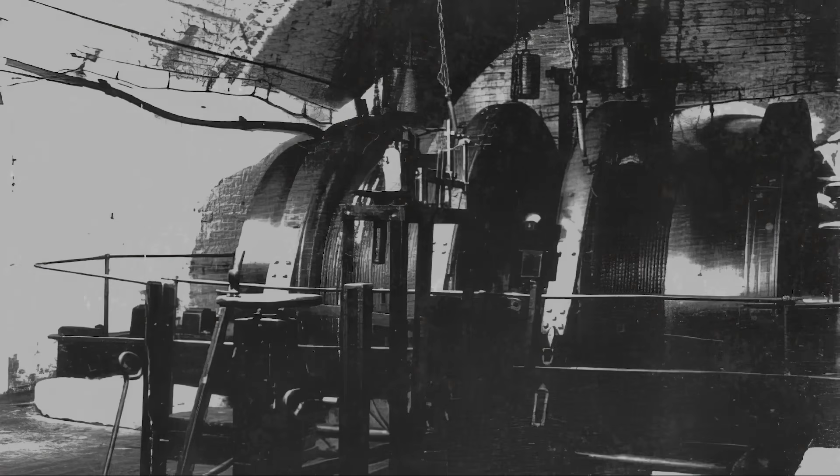1862, Northumberland, and the winding engine at New Hartley Colliery is already turning when the morning shift steps into the cage. The drum is cast iron, nearly 12 feet across, and the wire rope coiled onto it is thicker than a grown man's wrist. The engine house smells of hot tallow and coal smoke, and something older beneath both: the mineral exhalation of a shaft sunk more than 600 feet into the earth.

The floor of the house vibrates at a frequency too low to hear. Men feel it in the arches of their feet. They have felt it every working morning of their adult lives, and they do not notice it anymore, which is exactly how things stood on the morning of January the 16th. The banksman at the surface calls the signal. 3 bells. The engineman advances the throttle.

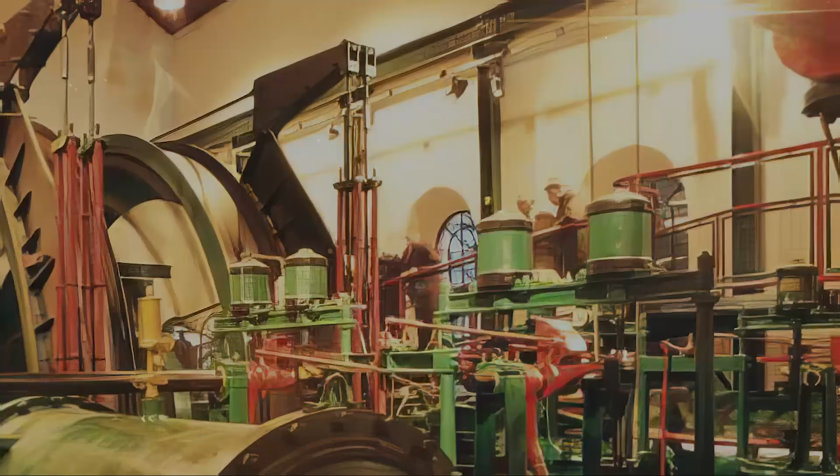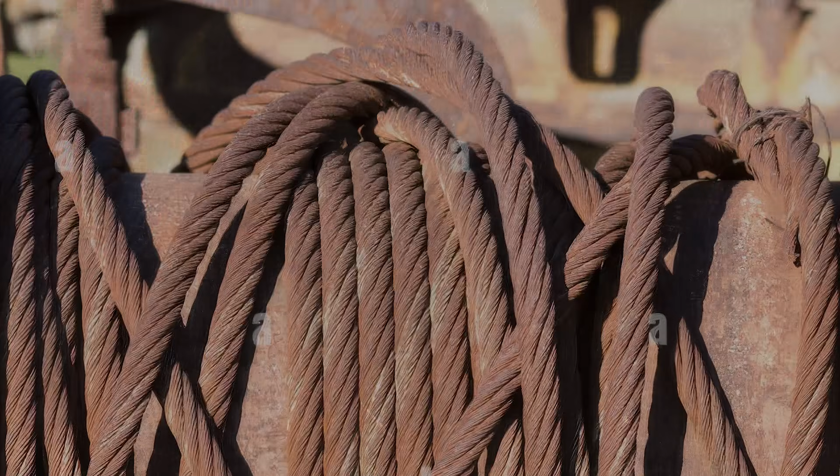The drum rotates. 204 men and boys ride down into the dark in the cage, and in the corves descending alongside it, the way they always do. Their bodies pressed together in the blackness, boots on iron, the rope above them taut and reliable. That is the last ordinary moment in the history of New Hartley.

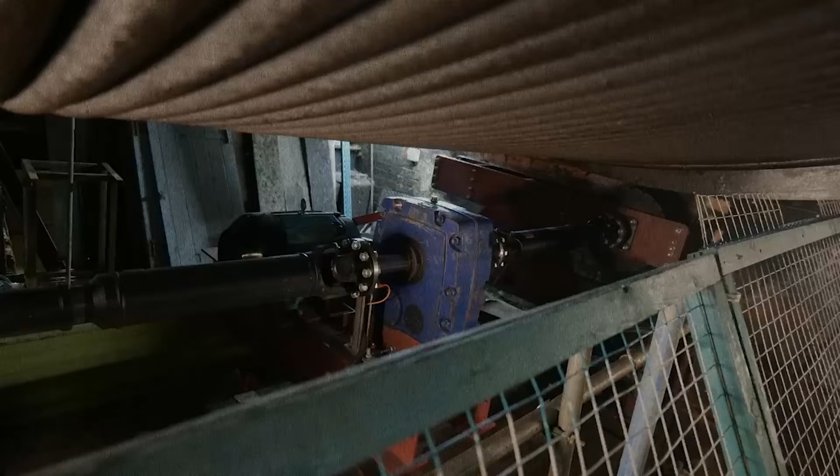What happens next? The snapping of a cast iron beam, the collapse of the headgear, the sealing of the only shaft, is not a failure of the winding engine itself, but the catastrophe it produces belongs entirely to the logic of the machine's world, a world built on the premise that a single rope through a single shaft is sufficient passage between the living and the dead.

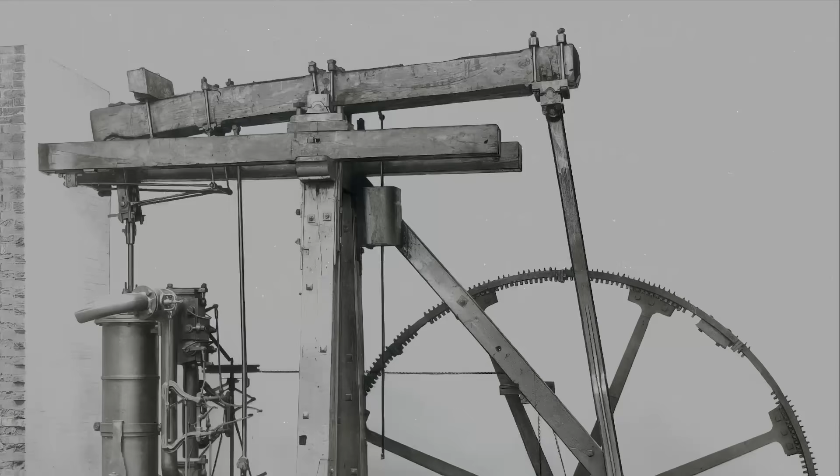To understand why that logic existed, why it seemed not just acceptable but rational for the better part of a century, you have to go back to the problem that created the winding engine in the first place. Back to the moment when coal became the appetite of an industrializing civilization, and the earth simply refused to give it up without cost.

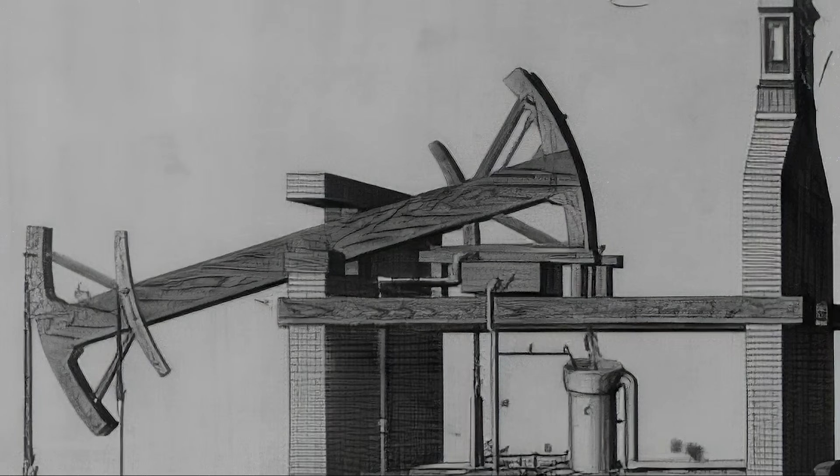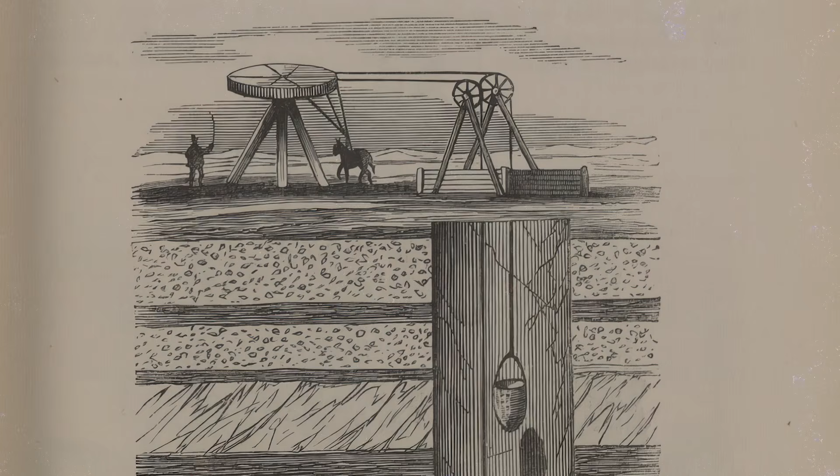By the early 18th century, the collieries of Northumberland and Durham had already exhausted the shallow measures. Shafts that once ran 150 feet had been worked to nothing. The seams men needed were deeper, 300 feet, 400, and the numbers kept growing, and at those depths, the horse gin, that ancient circular contraption of beam and horse and rope, reached the hard boundary of its physics.

A horse produces roughly 1 horsepower. A single gin could raise perhaps 40 pounds of coal per minute from 300 feet, and at that rate the economics of deep mining were simply impossible. The owners understood the arithmetic. The horses understood nothing except the circle they walked, but even they were being replaced not by a better horse,

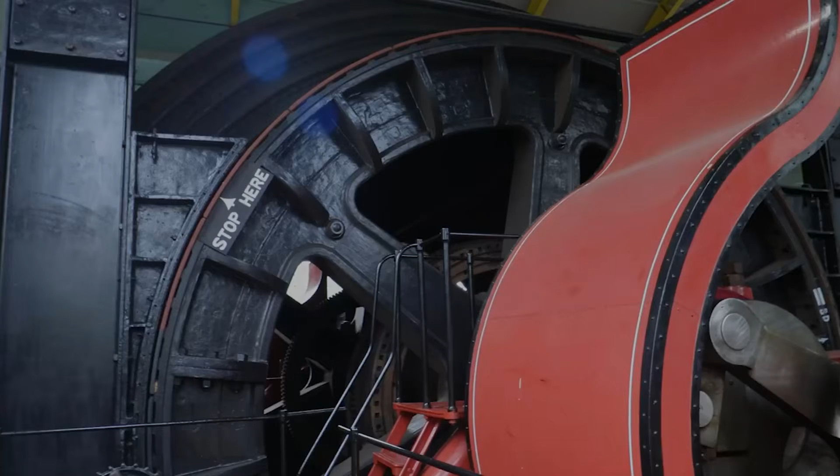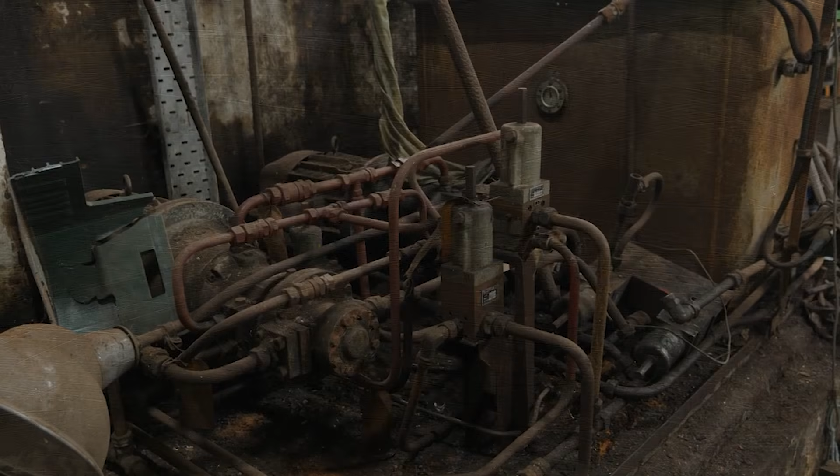but by steam. James Watt's improvements to the Newcomen atmospheric engine in the 1760s and 1770s produced a machine that could do rotary work, continuous rotary work, and the colliery owners of the northeast coalfields grasped the implication immediately. By the 1790s, winding engines driven by steam were replacing horse gins at the major Northumberland and Durham pits.

The transition was not gradual. It was a decision, made mine by mine, driven by the same calculation every time. Deeper coal, more coal, faster coal, and no animal alive could provide it.

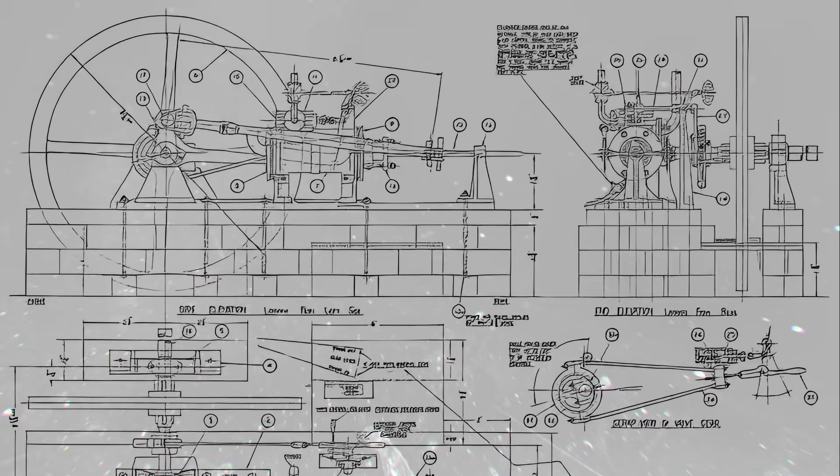John Buddle, the most capable colliery viewer of his generation, overseeing operations across the northeast coalfields in the first decades of the 19th century, understood the winding engine as the central nervous system of any serious mine. Without it, depth was a ceiling. With it, depth became a resource.

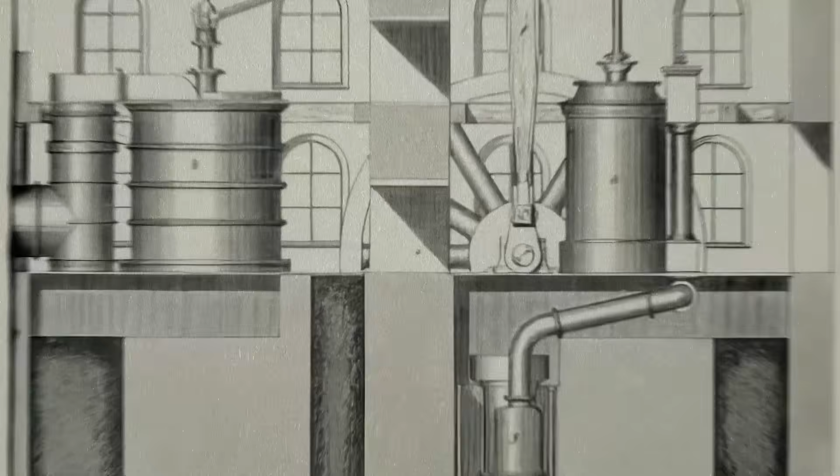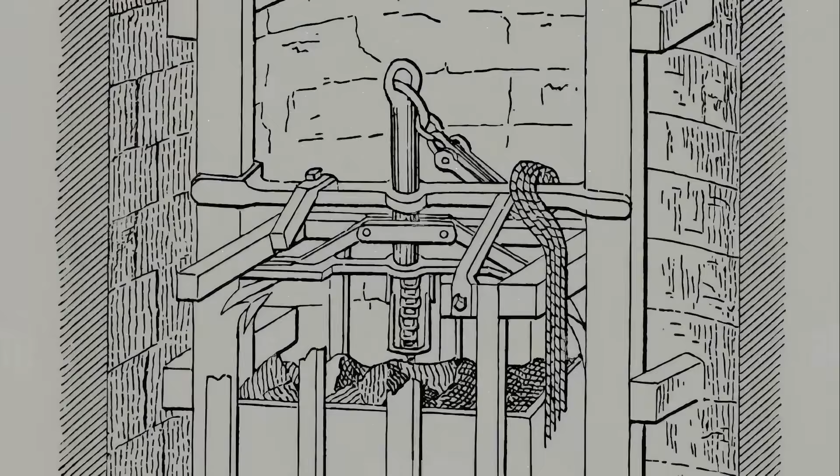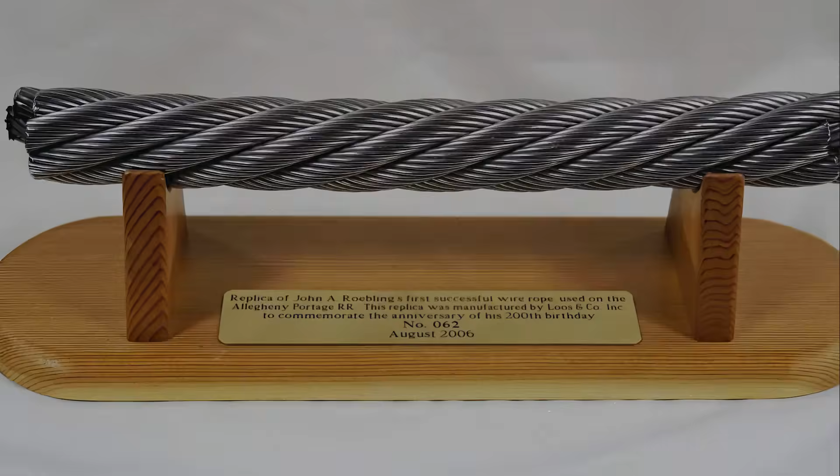The engine Buddle and his contemporaries installed was conceptually simple. A steam cylinder driving a crank, the crank turning a drum, the drum winding or unwinding a rope, the rope raising or lowering a cage or a set of loaded corves. The early drums used flat hemp rope, which limited load. Wire rope, adopted progressively through the 1830s and 1840s, changed everything: stronger, more consistent, capable of carrying far greater loads across far greater depths.

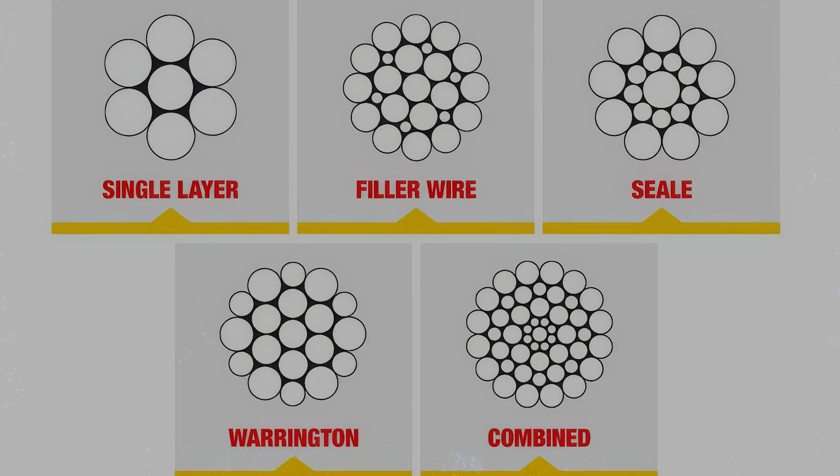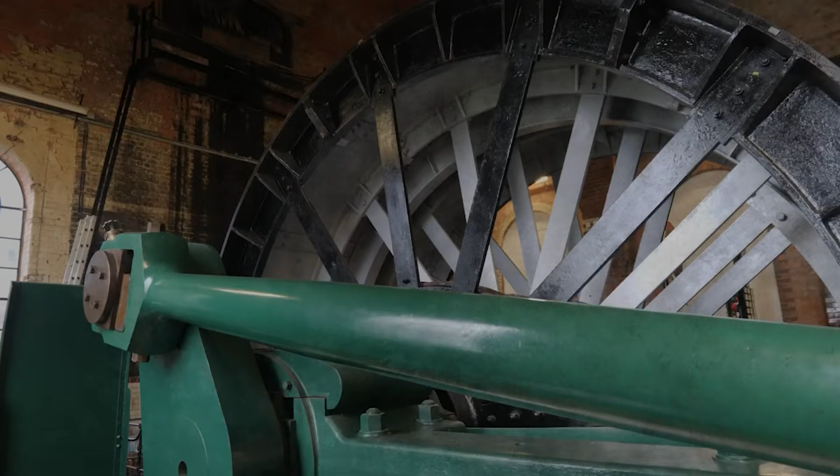The wire rope was itself a manufactured object of remarkable sophistication. Dozens of individual drawn steel wires twisted into strands, the strands twisted into the rope, each layer of twist running counter to the last, so that the whole assembly would not unravel under load. A good rope, properly maintained, could last years at moderate depths. At great depth, under repeated shock loading, it aged invisibly, its internal wires fatiguing in ways no surface inspection could detect until the moment of failure.

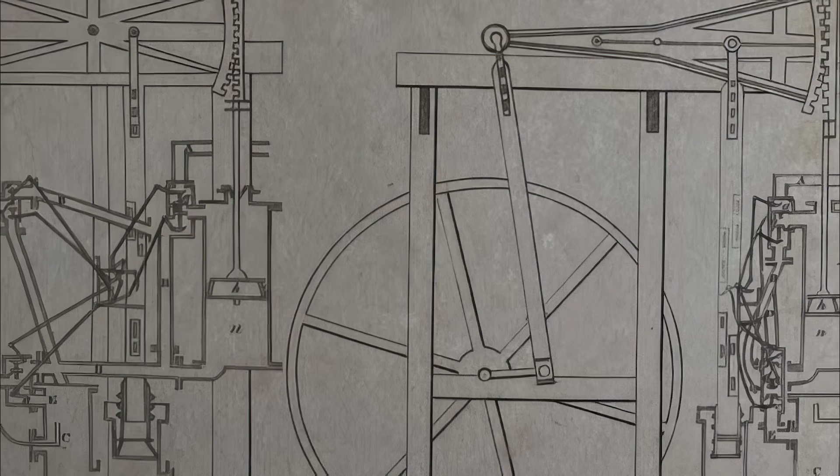And here is where the machine's first irony enters the story with the calm indifference of a mathematical fact. The larger and more powerful the winding engine became, the more energy it concentrated into that single rotating drum. A horse gin stored almost nothing. Stop the horse, the rope stops. A steam winding engine with a 12-foot drum spinning at speed stored kinetic energy in the tens of thousands of foot-pounds, and that energy did not care about the intentions of the engineman who governed it.

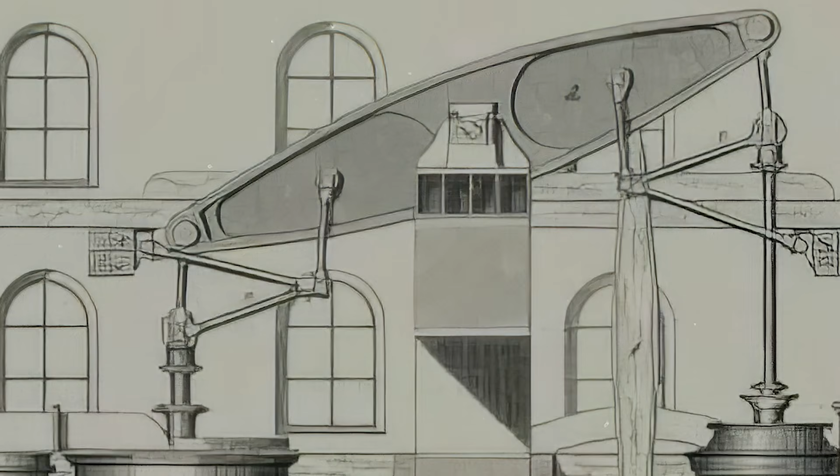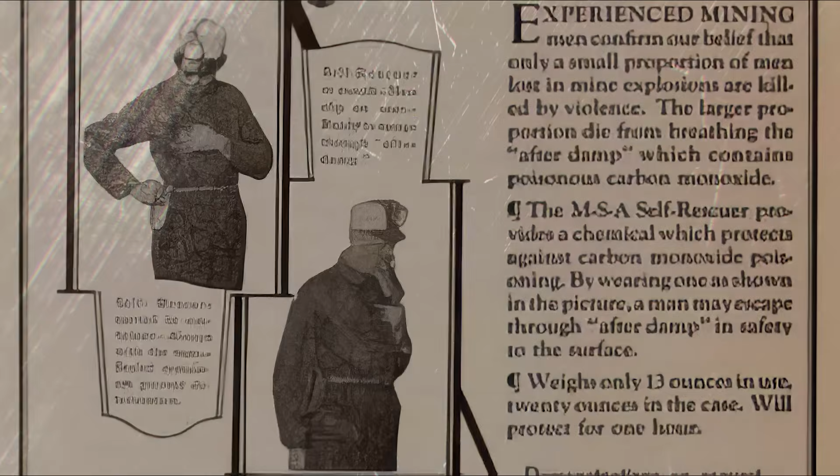To address this, engineers added governors, centrifugal devices that would theoretically cut steam supply if rotational speed exceeded a set threshold, and they added indicator boards, calibrated dials that showed the engineman where the cage was in the shaft at any moment. These were the safety systems. They worked most of the time, and their existence gave the owners and the regulators a language of reassurance. The machine had protections. The protections were documented. That was, for several decades, considered sufficient.

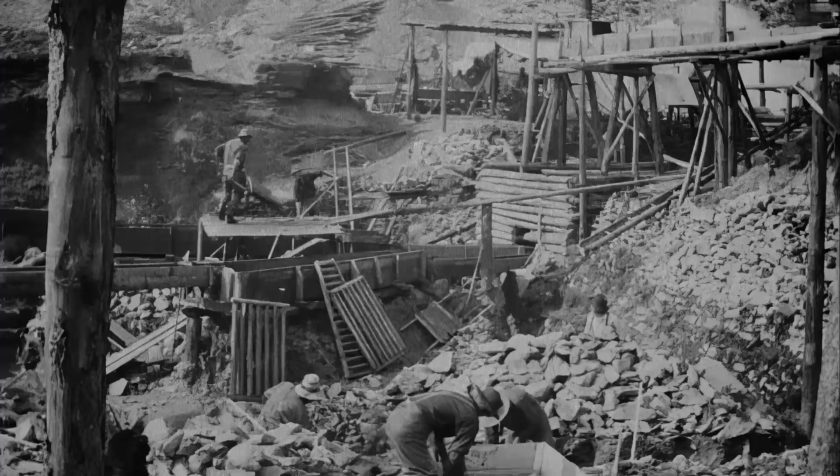By the 1840s and 1850s, the winding engine had spread to every significant coal field in Britain and had crossed the Atlantic to the hard rock mines of Pennsylvania, Michigan, and Virginia. It had crossed to the gold reefs of New South Wales and the copper lodes of South Australia. Everywhere the logic was the same: one shaft, one rope, one drum, one engineman.

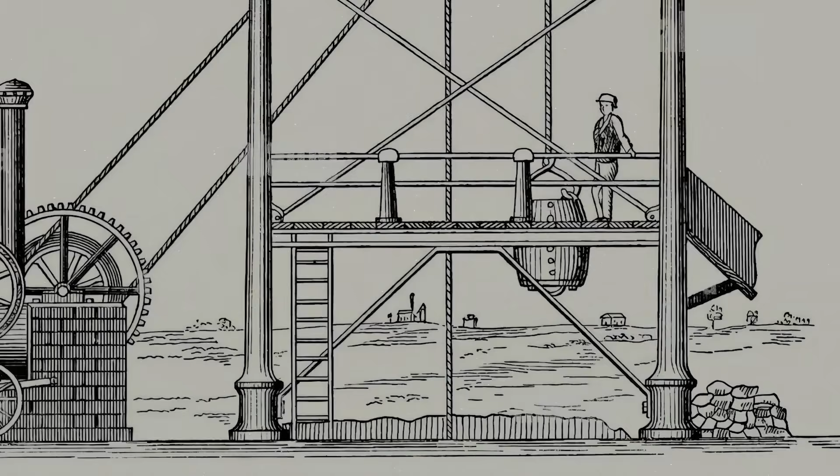Mines Inspectorate reports from the 1850s, the first systematic records of shaft accidents in British collieries, noted overwinding incidents with a frequency that should have been alarming. A cage carried too far up the shaft by an engineman who misjudged his indicator, the rope snapping under the sudden arrest, the cage falling, men killed or maimed.

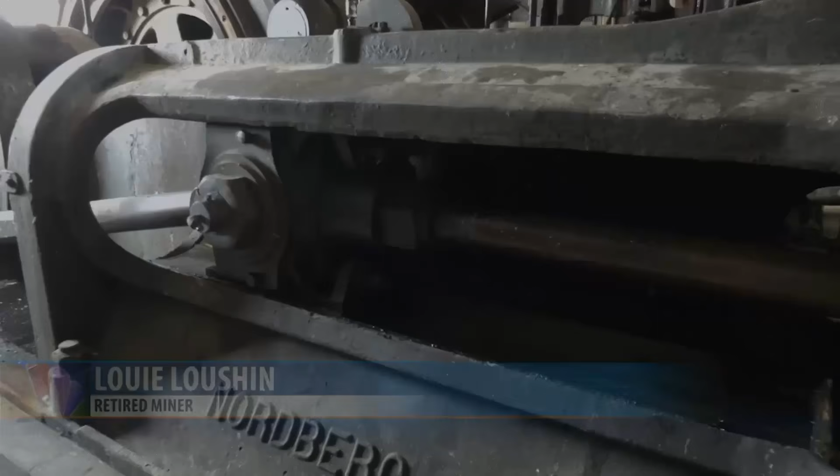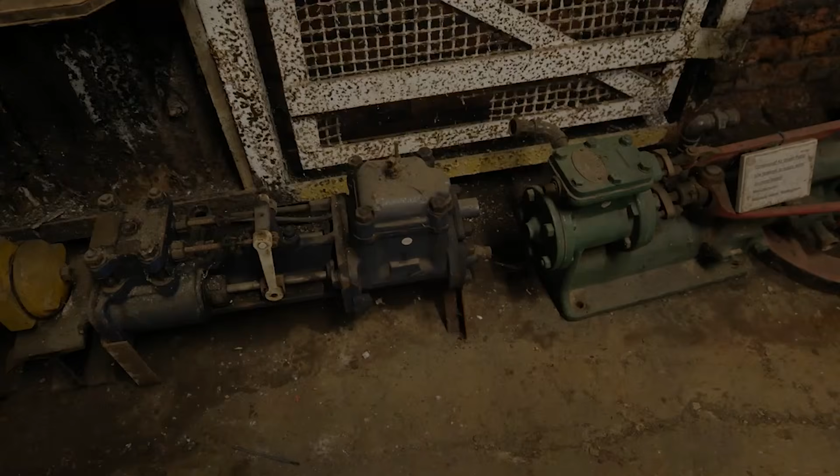The detaching hook was the engineering response, a device fitted above the cage that was supposed to release the rope automatically if the cage overshot the surface, allowing the cage to settle onto the headgear structure rather than being pulled through it. It was a genuine innovation. It was also a mechanism that required precise calibration, regular testing, and correct installation to function at all.

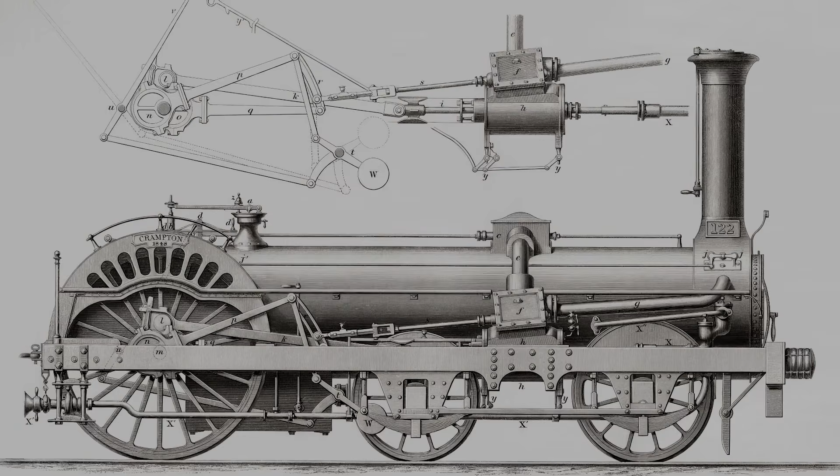And the Inspectorate's own reports across the 1850s and 1860s documented dozens of cases where detaching hooks had been set incorrectly, had not been tested within any reasonable interval, or had simply failed to trigger when the moment arrived. The system had a safety layer. The safety layer depended entirely on maintenance discipline that the economic logic of the mine consistently eroded.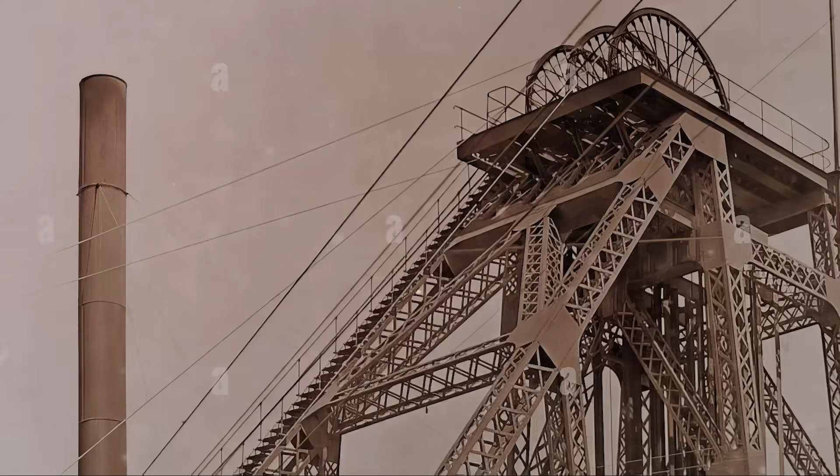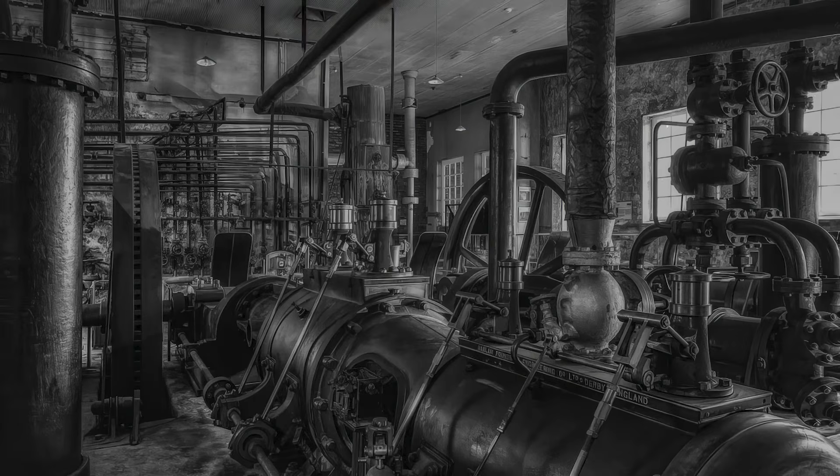By 1870, there were more than 500 steam winding engines operating in the British coalfields alone. By 1890, the shafts they served had deepened substantially, 800 feet, 1,200 feet, and in South Africa, where the Witwatersrand gold rush of 1886 began sinking reefs to previously unimagined depths, shafts would eventually reach more than a mile underground.

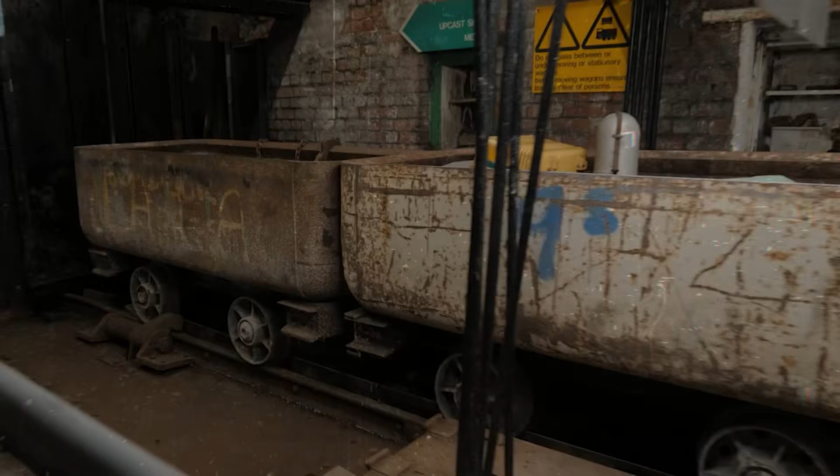The engine houses above those South African shafts were enormous brick structures, their interiors hot even in winter from the radiant heat of cylinder jackets and steam pipes, the air tasting of iron oxide and grease, the vibration through the concrete floor strong enough to blur a man's vision if he stood in the wrong place and looked at a fixed point. At those depths, the winding rope itself weighed tons before any cage or payload was attached.

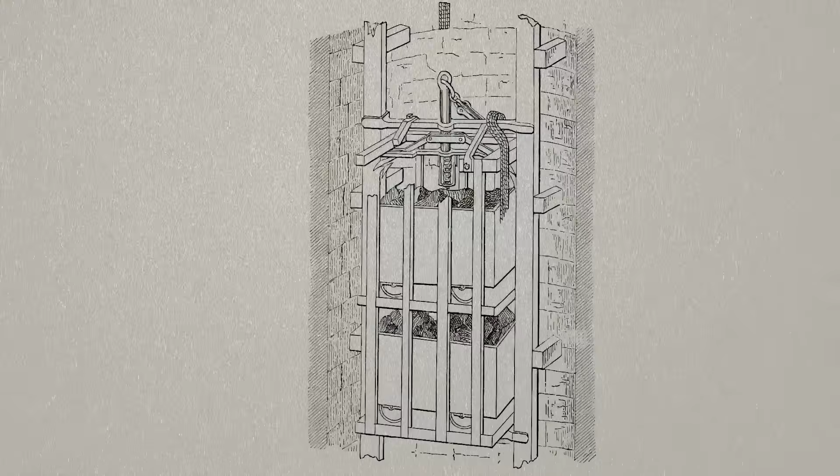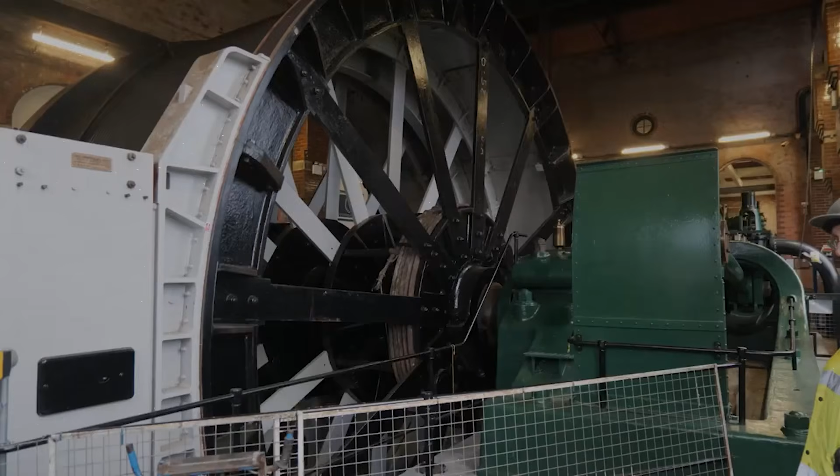A rope of steel wire descending 3,000 feet and returning weighed more than the loaded cage it carried, and the dynamics of that rope, its elasticity, its resonant frequency under load, the shock wave transmitted through it when a cage was suddenly arrested, added layers of mechanical complexity that the original designs had never contemplated. The drum diameters grew to match.

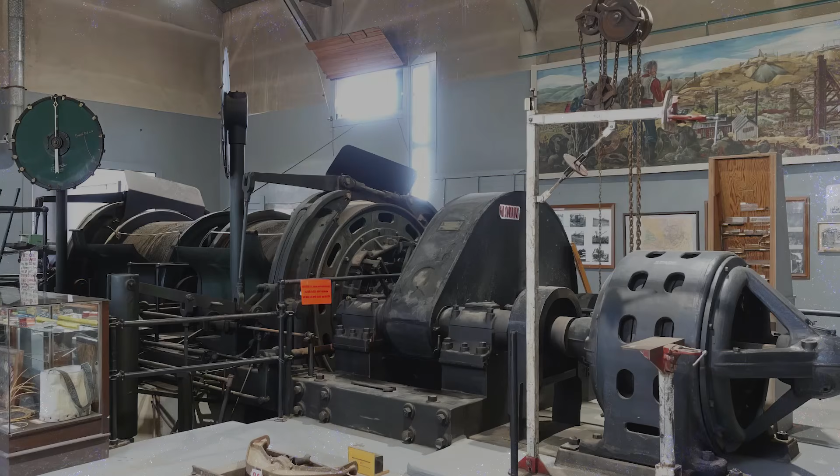Engines of 1,000 horsepower and more became standard at the deepest South African gold mines by the turn of the 20th century. The engineman sitting at his controls was now governing a machine that could accelerate a fully loaded cage from rest to 30 miles per hour in a matter of seconds and bring it back to a precise stop within inches of the surface bank.

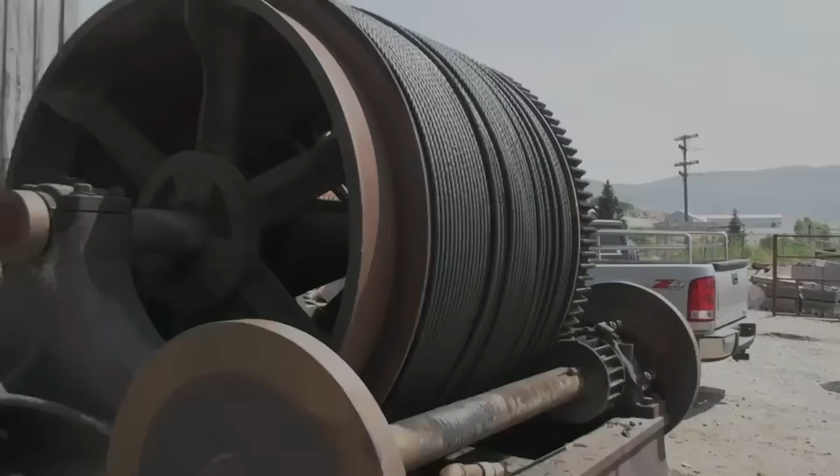Or fail to stop it, at which point the stored energy in the rotating drum was not a theoretical quantity, but a physical event. This is the second irony, and it is the one that the engineering profession understood perfectly in the abstract and managed imperfectly in practice.

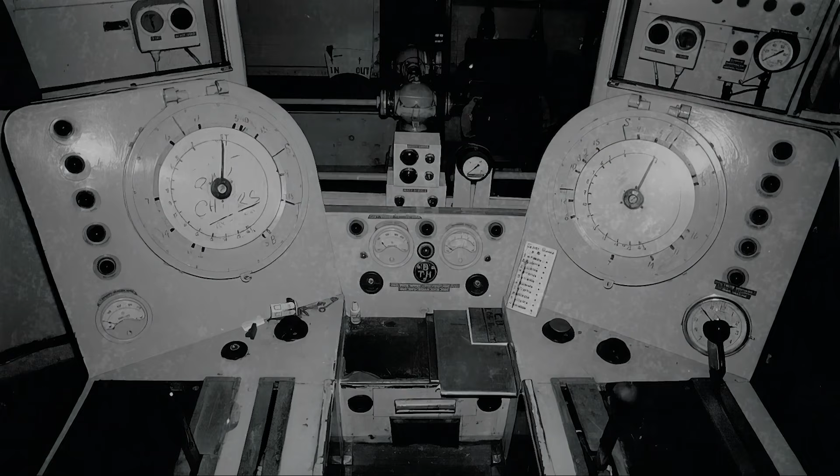The feature that made the large winding drum reliable, its massive rotational inertia, which smoothed out load variations, prevented jerking, maintained steady rope tension across the full depth of the shaft, was the same feature that made it impossible to arrest quickly once control was lost.

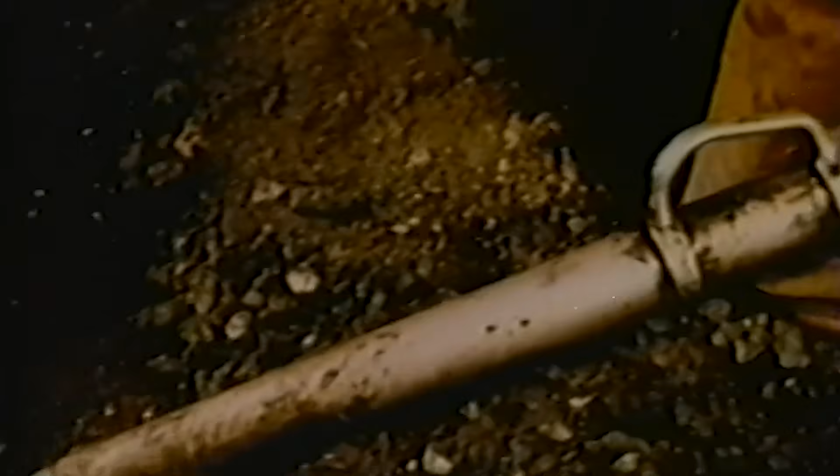A small drum with little inertia could be braked hard and stopped in a few rotations. A 12-foot cast iron drum spinning at speed, with several tons of rope and cage in motion, would continue rotating for seconds after maximum braking was applied, and in a winding engine, seconds translated directly into feet of rope travel, and feet of rope travel at the top of the shaft translated into structural catastrophe.

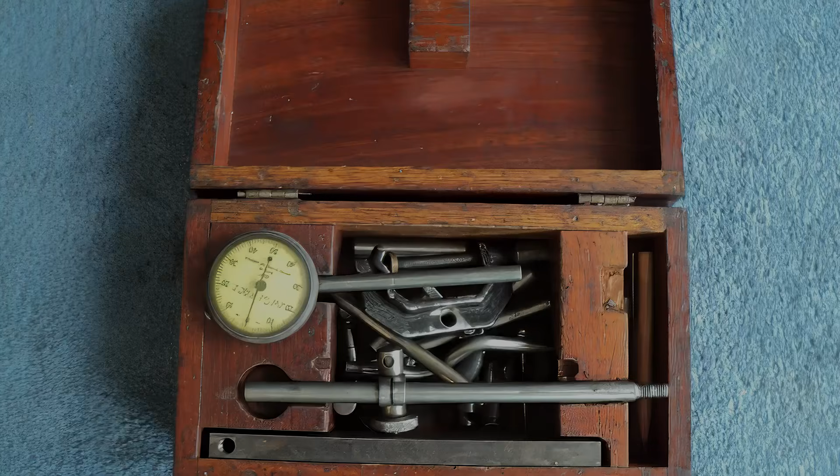The engineman was not a passive observer of this process. He was its last control system. His hand on the throttle, his eye on the indicator board, his judgment about the slight lag between the board's reading and the cage's true position, these were the final barriers between a successful winding cycle and an overwinding event.

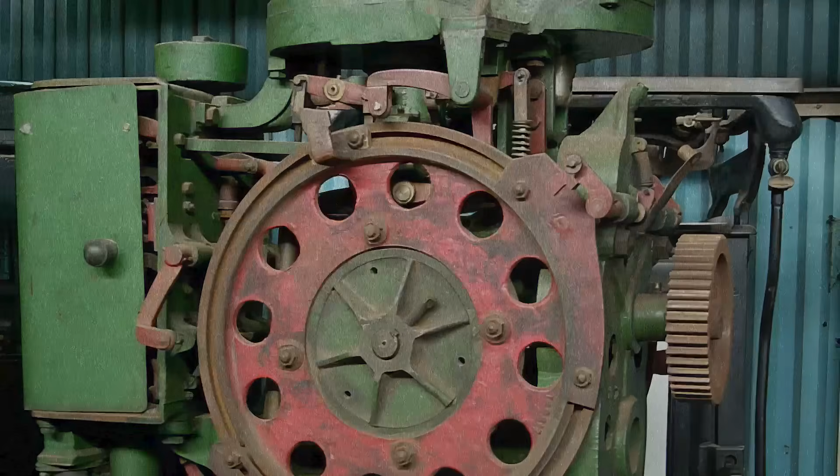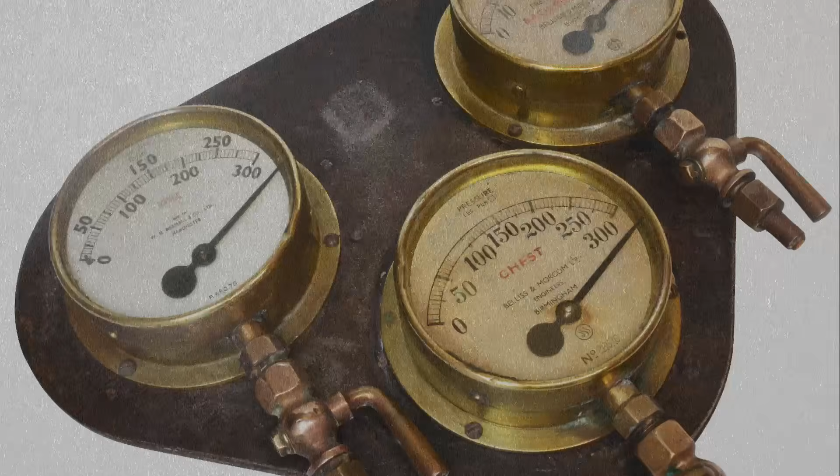The indicator board itself was a mechanical instrument, a dial whose needle was driven by a gear train connected to the drum shaft, calibrated at installation to show cage position against depth markings painted or stamped on the face. Over years of operation, the gears wore, the calibration drifted, and the discrepancy between what the board showed and where the cage actually was might amount to 10 feet or 20: manageable error at shallow depth, potentially lethal error in the final 50 feet of a fast wind.

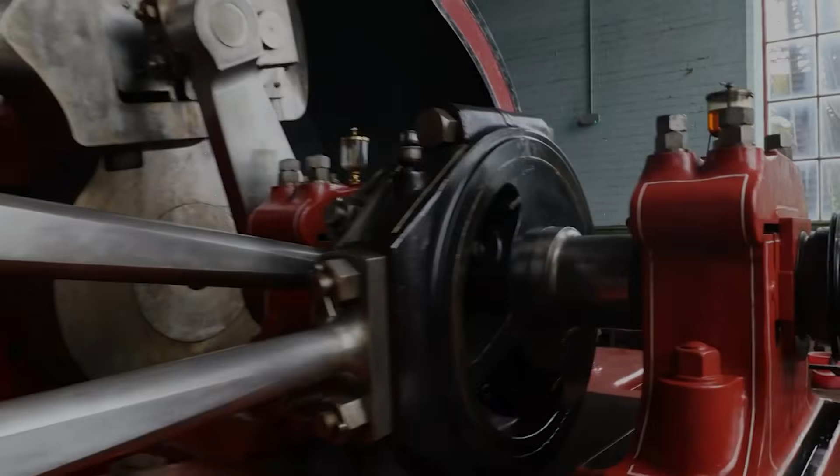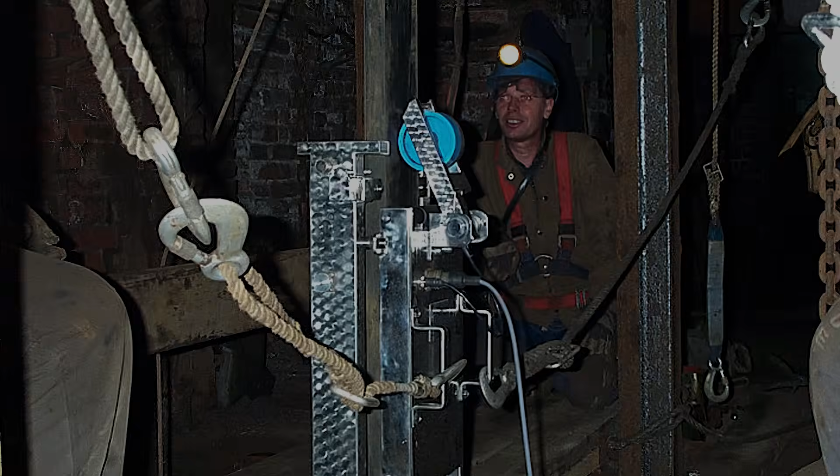Enginemen who worked a single installation for years developed an almost proprioceptive understanding of their machine. They felt the load through the engine's behavior. They heard the sound of the rope on the drum change as the cage approached the surface. Some could read the engine's steam pressure gauge and the indicator simultaneously and adjust for the slight inaccuracy they knew their particular indicator carried on warm days versus cold. This expertise was real. It was also unreproducible, untransferable, and entirely invisible to the owners who depended on it.

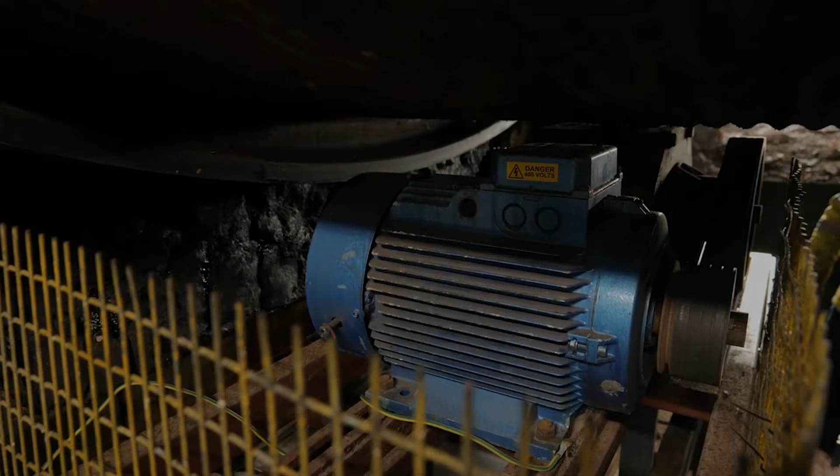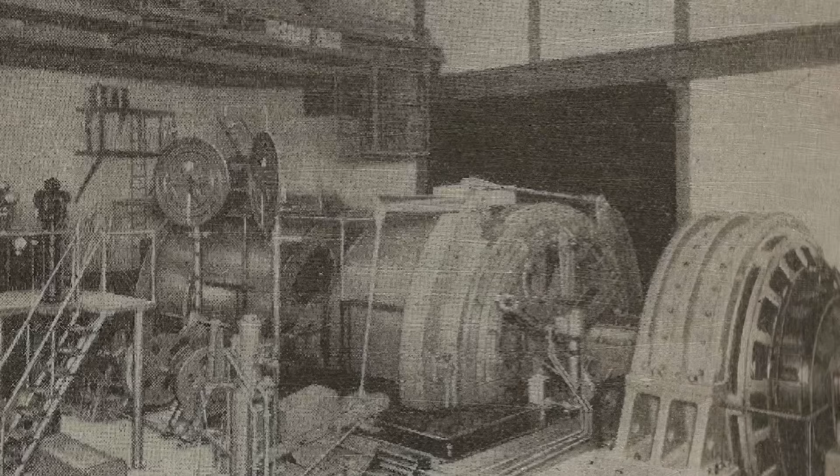The colliery owners of the 1880s and 1890s were managing operations that had grown enormously in scale and complexity, and their relationship to safety was mediated almost entirely by accident frequency, not by the accumulating stress cycles in aging rope, not by the calibration drift in indicator boards that had never been recertified, not by the quiet erosion of testing discipline for detaching hooks at installations where no accident had occurred in 15 years, and where testing meant downtime and downtime meant lost production.

The HM Inspector of Mines' annual reports from this period document a pattern that, in retrospect, reads with the clarity of inevitability: minor overwinding incidents at a colliery, an inspector's recommendation for improved indicator maintenance or more frequent hook testing, acknowledgement from the owner, and then, months or years later, the next entry from the same colliery, or one structurally identical to it. Reports were filed. Recommendations were noted. The drums kept turning.

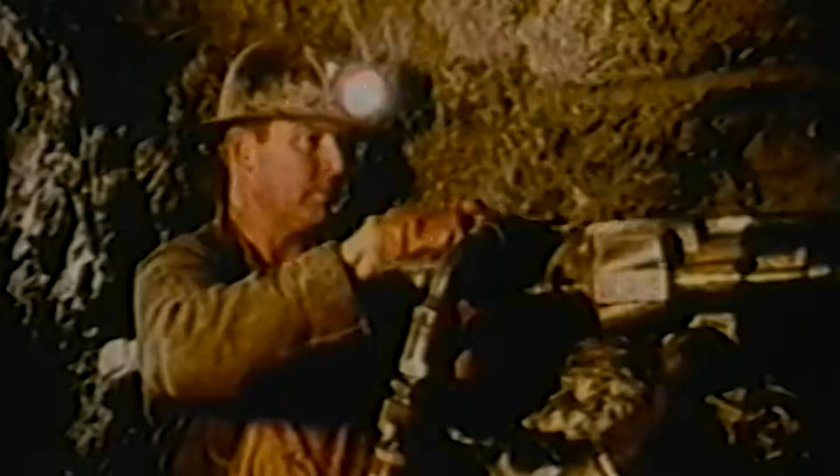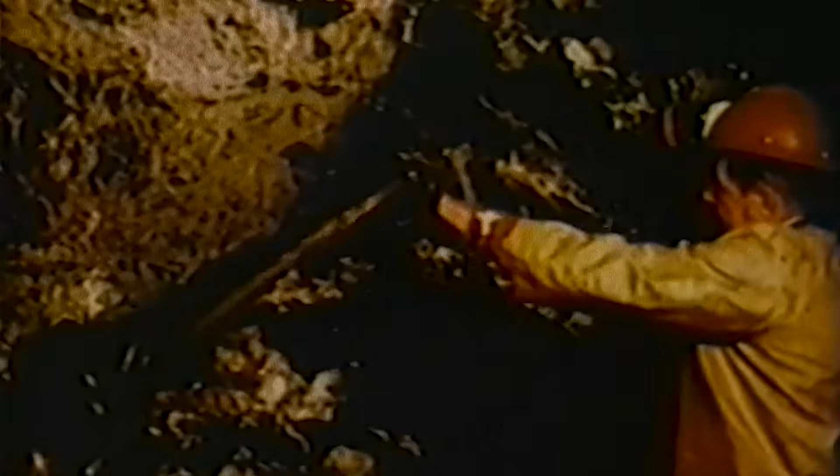And the inquest documents of that period show inspectors repeatedly circling around the question of single-shaft operations without ever formally condemning them. The machine that worked was the machine that was trusted, and the machine that was trusted was the machine whose fundamental design assumptions went unexamined.

The disaster that crystallized all of these forces most completely for the British mining public had already occurred at New Hartley in 1862, and it is worth dwelling on what actually happened there, because it is not quite the story most accounts tell. The winding engine itself did not fail. What failed was a 40-ton cast iron beam that was part of the pumping engine adjacent to the shaft, a beam that had been showing signs of wear, that operators had noted but not replaced, that broke under load and fell directly into the only shaft serving the colliery.

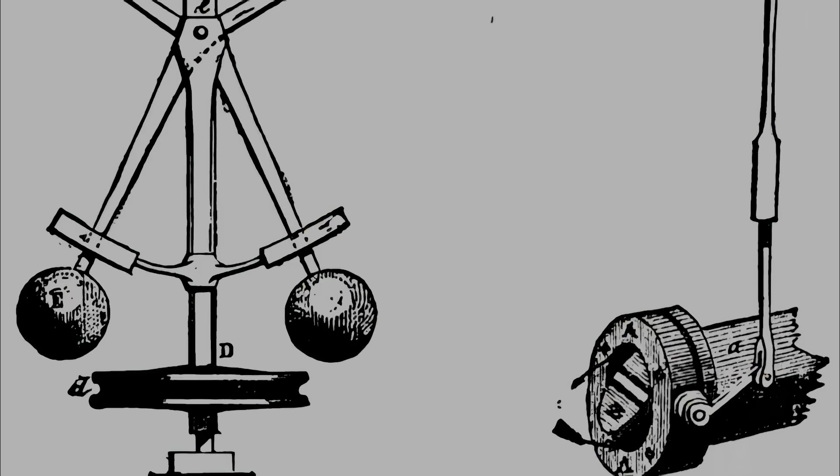204 men and boys were underground. The cage could not reach them. The shaft was blocked. They died over the following days not from the initial impact, but from asphyxiation as the ventilation system, which also ran through the single shaft, failed.

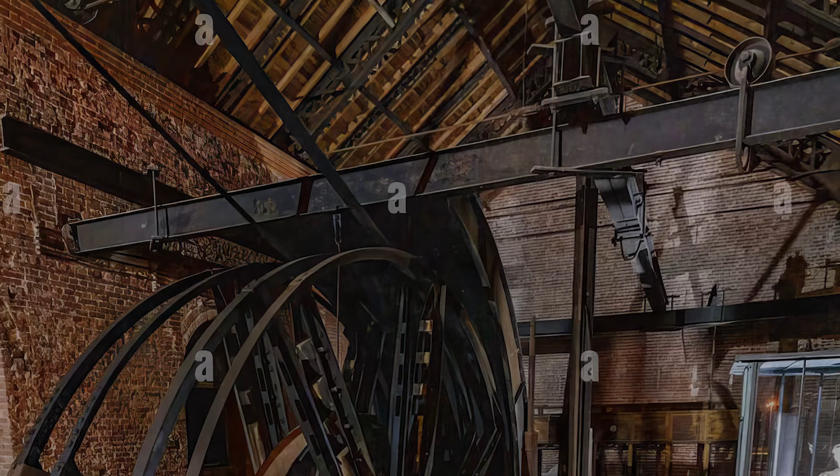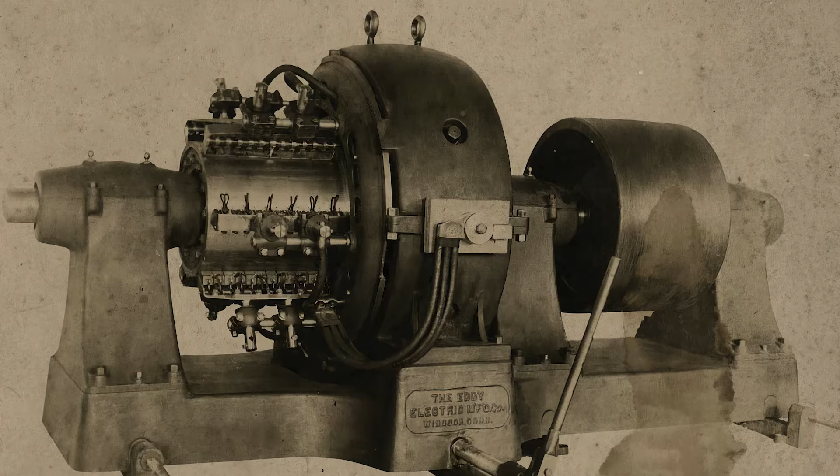The coroner's inquest and the subsequent parliamentary inquiry produced extensive documentation. The condition of the beam had been observable. The risks of single-shaft operations had been raised previously in engineering circles. The men underground had worked in a system that offered them no second means of egress.

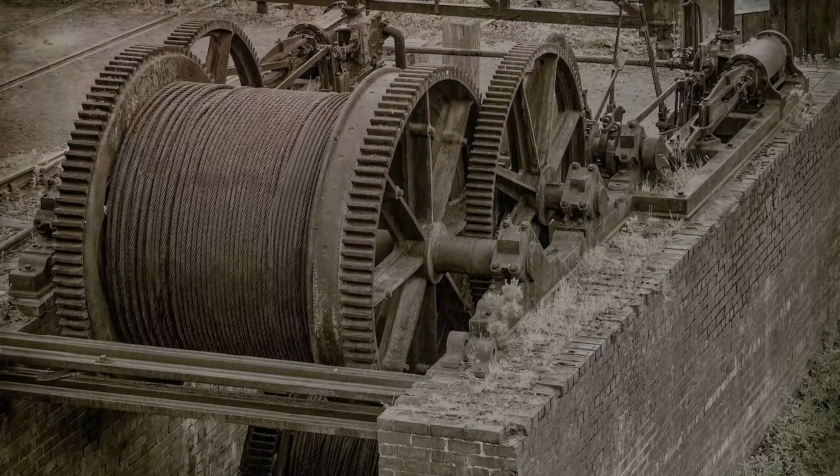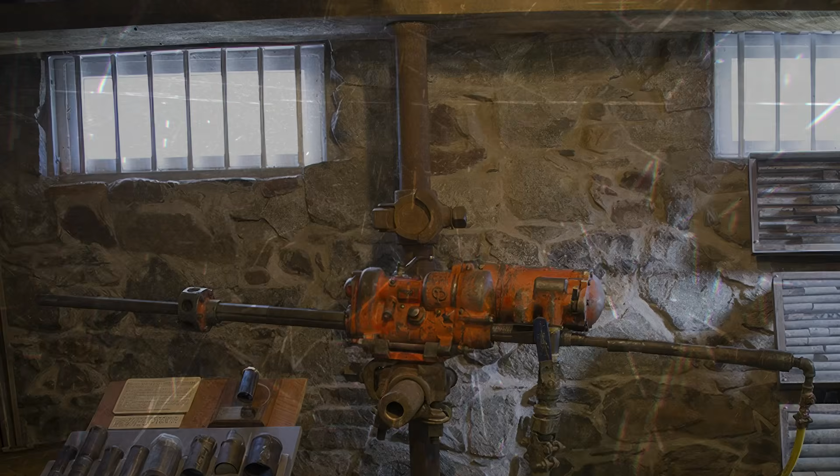What the inquiry produced in terms of legislation was the Coal Mines Regulation Act of 1862, which required all new mines to have two shafts separated by a sufficient distance to prevent a single event from blocking both. It was a meaningful reform. It was also a reform that applied to new mines, that exempted many existing operations for years, and that addressed the single-shaft problem without addressing the engineering assumptions built into the winding apparatus itself.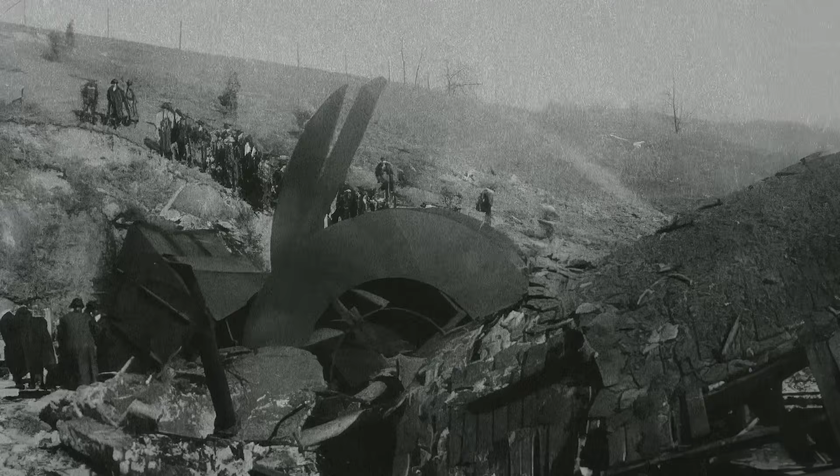The indicator boards kept their original calibration tolerances. The governor testing intervals remained advisory at many installations. The detaching hook remained a device whose function in a real overwinding event depended on conditions, hook setting, cage speed, rope elasticity at operating temperature, that the routine inspection cycle did not reliably verify. The investigation, thorough by every standard of its era, had measured the specific catastrophe. It had not measured the system.

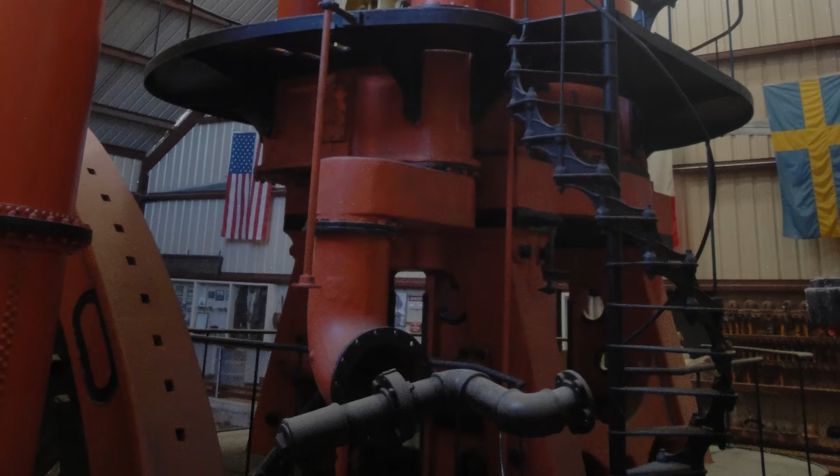This pattern, legislation following catastrophe, legislation addressing the specific rather than the structural, repeated itself across the following decades with the regularity of a mechanical process. Each major winding accident produced its inquest, its inspectorate report, its parliamentary question, its amendment to the Mines Regulation Acts.

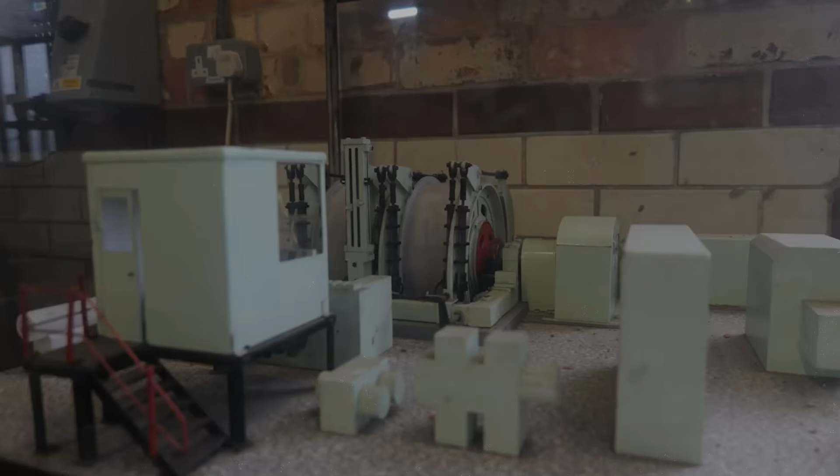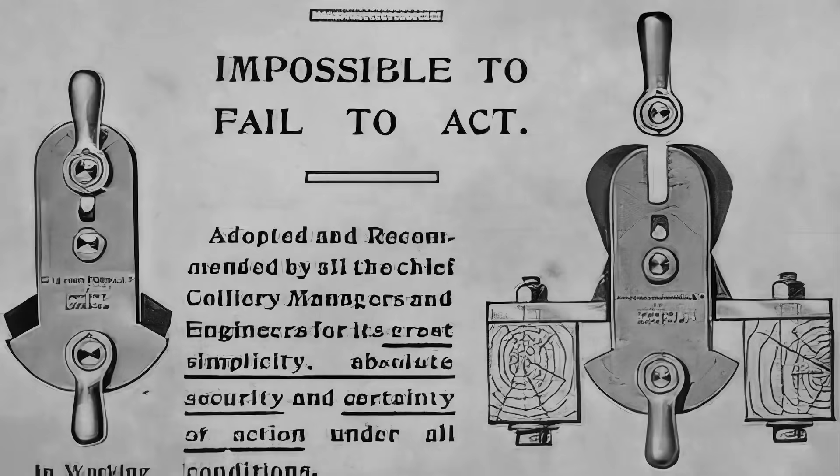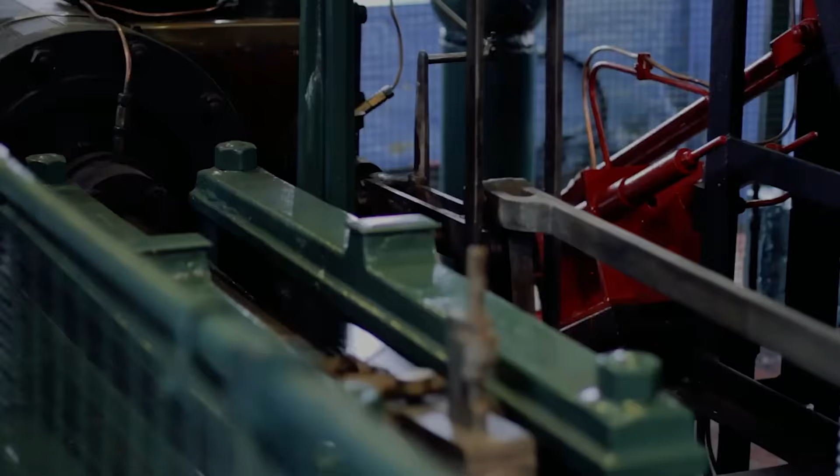The Coal Mines Act of 1911, the most comprehensive mining safety legislation Britain had yet produced, mandated automatic overwinding protection devices at all winding installations, mechanical governors, and clutches that would trip without the engineman's intervention if the cage exceeded a set speed near the surface. Engineers, including W.C. Mountain and others working in the safety device field through the 1900s, had developed reliable automatic protection systems, and their adoption after 1911 was genuine progress.

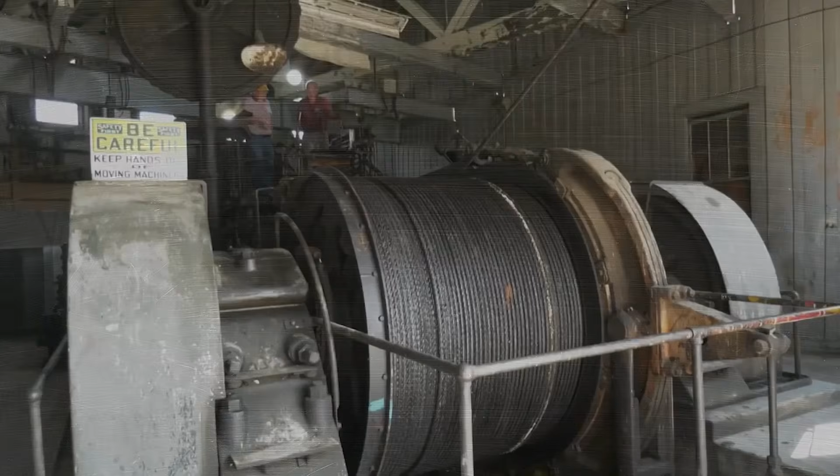But adoption across the existing stock of several hundred winding installations was slow, contested, and expensive. Older collieries argued for exemptions. Equipment manufacturers quoted retrofit costs that owners translated directly into reduced margins. The Mines Inspectorate, with limited enforcement capacity spread across a vast industry, could not compel simultaneous compliance. Automatic devices were fitted. Overwinding accidents continued, at reduced frequency.

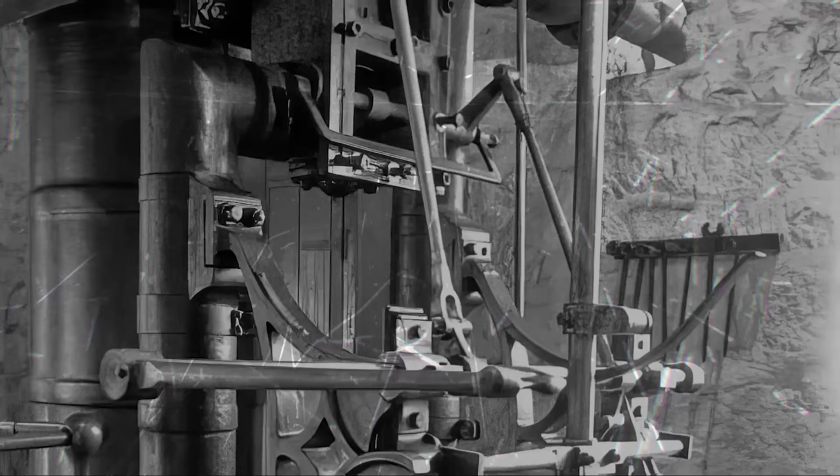For decades, the reform had entered the frame. The economics of the existing machine argued back, and the economics were not irrational. They were simply pointed at a different calculation than safety. What finally ended the steam winding engine was not safety legislation, but electricity.

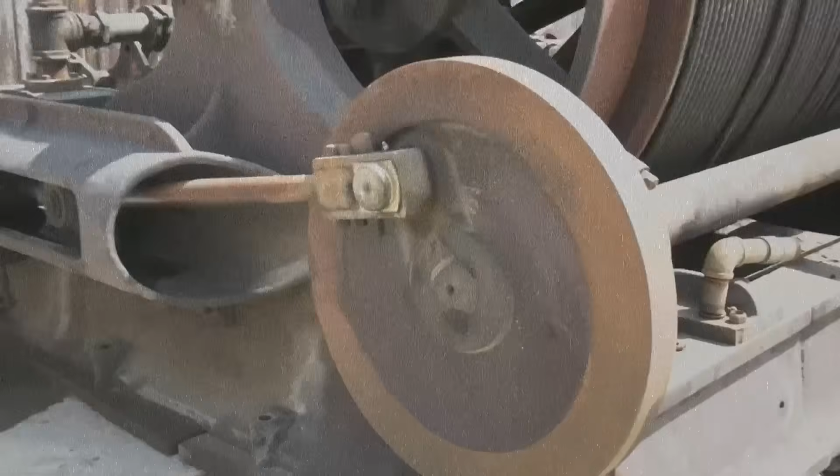Through the 1920s and 1930s, electric winding engines began replacing steam installations at colliery after colliery across Britain, South Africa, and the American coalfields. Electric motors offered continuous variable speed control through the full winding cycle with a precision that steam throttle and valve systems could not match. They could be integrated directly with automatic speed-limiting circuits that did not require a separate mechanical governor to trip, but that were embedded in the motor control system itself, cutting power and applying brakes at preset approach speeds without any human intervention in the chain.

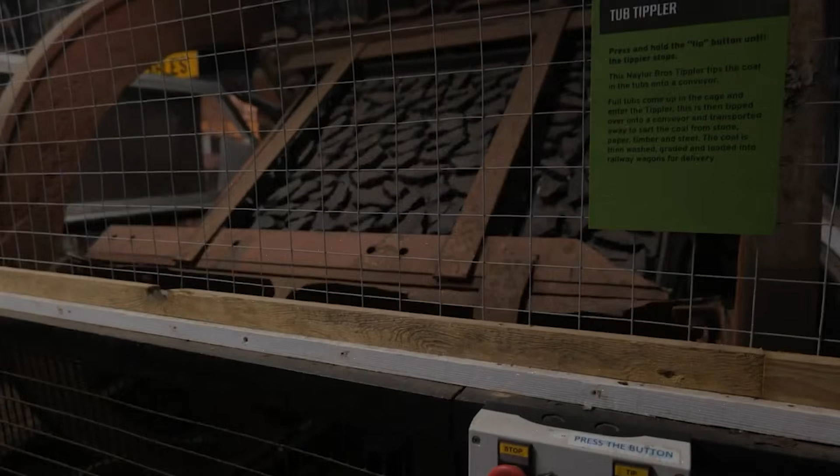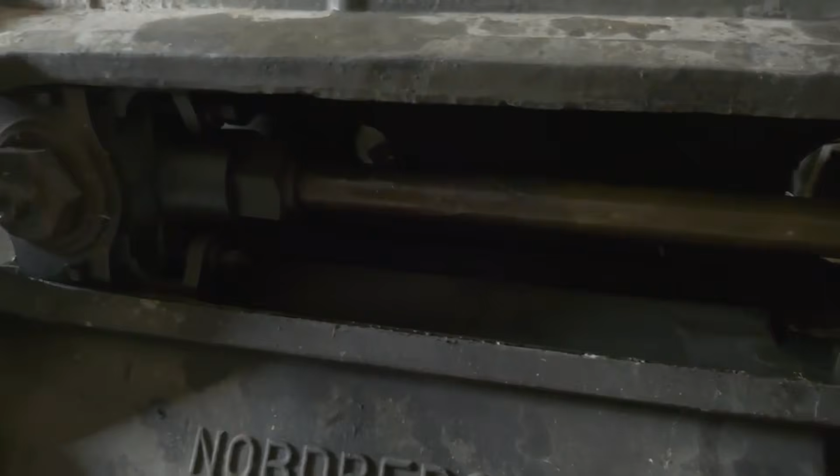The engineman remained at his controls, but the controls now included automatic systems that would override his judgment if his judgment failed. The thing that had been the system's fatal dependency, one man's trained instincts as the last barrier, was, for the first time, structurally removed from the failure pathway. The last operational steam winding engines at deep-shaft British collieries were retired through the 1950s and 1960s as the nationalized coal industry systematically modernized its plant.

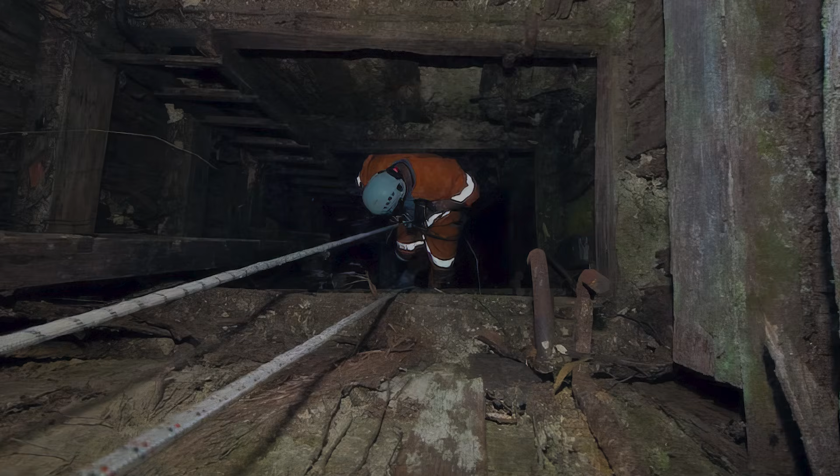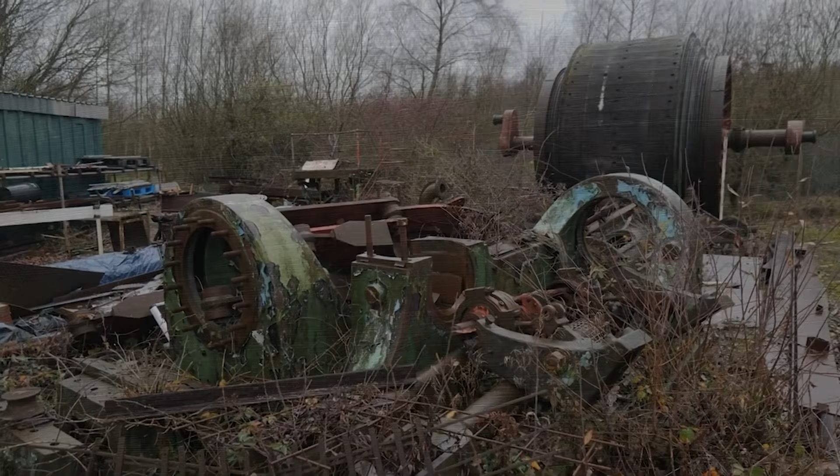Some were preserved. The engine house at Beamish Museum in County Durham contains a preserved winding engine of the type that served the northeast coalfields for more than a century, its drum motionless, its rope coiled, its indicator board arrested at a reading that once told an engineman where his men were in the dark. The floor of the engine house no longer vibrates. There is no smell of hot tallow, no subsonic thrum through the timber, no sound of rope under load.

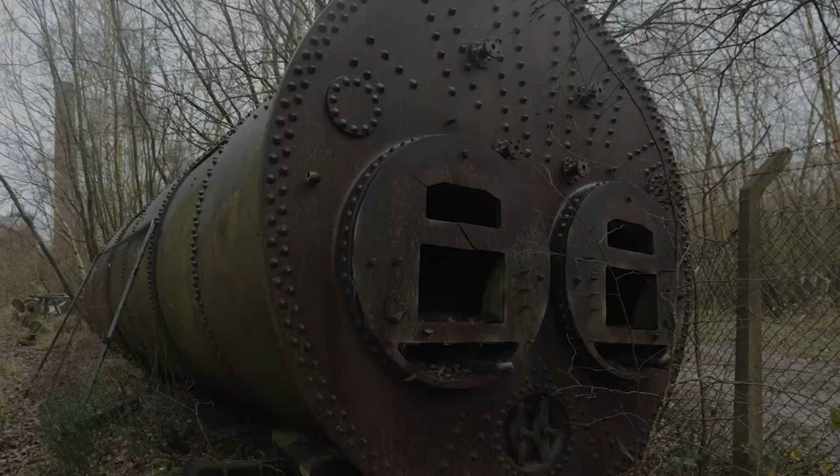The machine is cold. The men it once carried are long gone. And the silence, where the drum used to turn, is the exact measure of what the industry spent 100 years failing to build into the system while the machine was still alive: the certainty that no single moment of human error, no single point of mechanical failure, could seal the only passage between the men below and the world above.